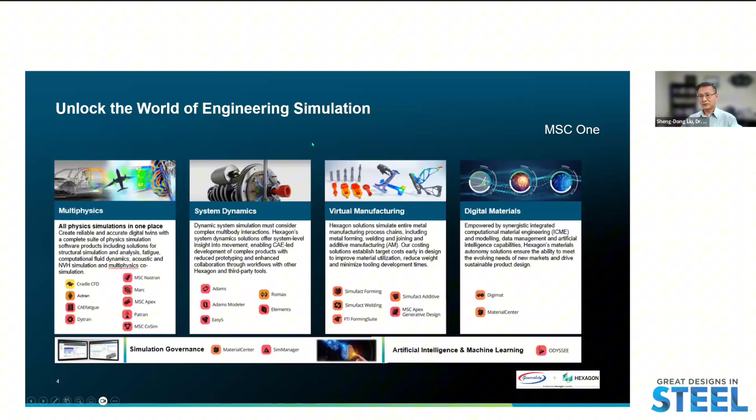Now, I'd like to talk about why do we need AI, or why do we want to introduce AI in vehicle structure design? Well, traditionally, CAE simulation in vehicle structure design is very time consuming. You need to hire a PhD or at least a master's degree holder to run or set up CAE models. To run the CAE, it takes a long time, many CPU hours, and it's very hard to handle all the complex processes. You may make an inaccurate decision because you don't have enough data, and you may get a kind of low quality results.

And the most important thing is you may not be able to utilize all the historical data. In manufacturing history, we have accumulated lots of data in the past. If we cannot utilize it, that's a kind of big waste - not only test data, but data from the manufacturing plants, and also all the CAE simulation data. We have simulated a lot of vehicle structures, but without AI, it's hard to dig out all that data and have full utilization of it. So that's why we want to use AI to help us.

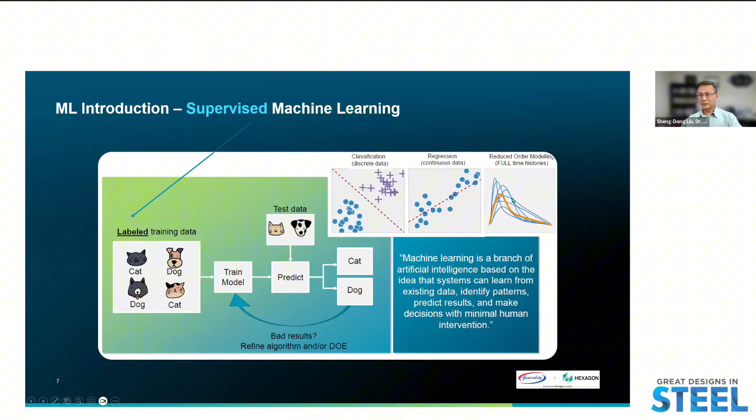If we have a new vehicle structure, we want to know what the crash acceleration curves or impact force look like at some conditions. So we ask AI to give us a kind of prediction.

And this shows how we are using AI in the CAE process. At the very beginning, we may have some design ideas. We have a lot of design variables, so we may have different ideas in this kind of variable plan, and then we start to create CAD geometry, CAD data, then generate an FEA mesh, build an FEA model. Then we run the FEA solver like LS-DYNA or Nastran or Abaqus, those types of software.

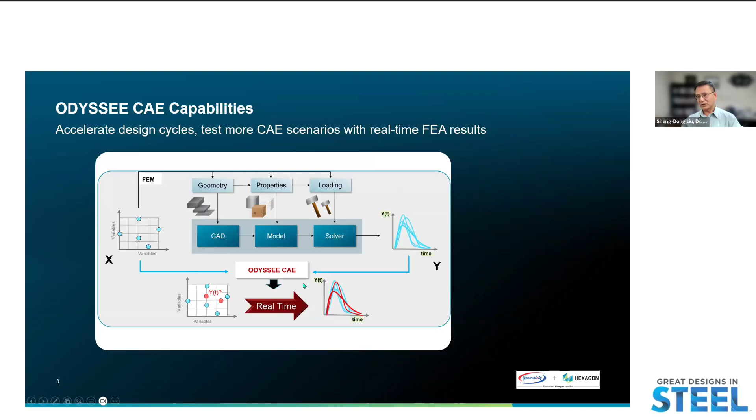Then the FEA software gives the output results like force and time curves, maybe also the stress strain distributions, deflections, those types of outputs. So next time when we have a new set of ideas or new design data, once the model is trained, we enter the data into the AI system. It will automatically, in real time, give us all types of responses. So that's how AI is working in CAE.

Where can AI be used in the design process? The first is at the pre-design stage, we can use it for parametric studies and trial and error to find which part is important, which part is not important, those types of things. Then after the design is done, we can do the optimization to find the most optimal solutions. Once the product is in operation, we can also do reliability studies and robustness evaluations.

So this graph compares the costs. Without AI, say for a vehicle crash, anytime we have an additional iteration, the computation cost basically increases linearly. So if each run is 10 hours, 10 runs will be 100 hours. It's very simple mathematics.

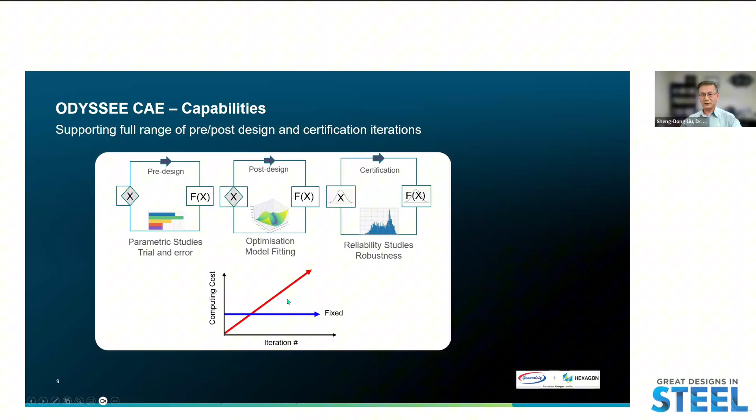But with AI, there's some initial cost at the beginning. We need to run some models to train the AI. But once the model is trained, the computation cost is very minimal. Each run maybe only takes a couple of seconds. So cost-wise, in case we need to do a lot of iterations like optimization or parametric studies, this is very, very cost effective.

Then to run AI, we start with some initial designs, called the design of experiments. We select some design conditions. Then as the animation shown here, we start with some limited number of initial training models. This red point is used for validation purposes.

So if we have a set of data, maybe we want to take say 90% of the data for training the model, and another 10% of data for validation to see if the model works well or not. So if the error is not satisfactory, we need to retrain the model. In that case, we can increase the space of design experiments. This is called an adaptive design of experiments.

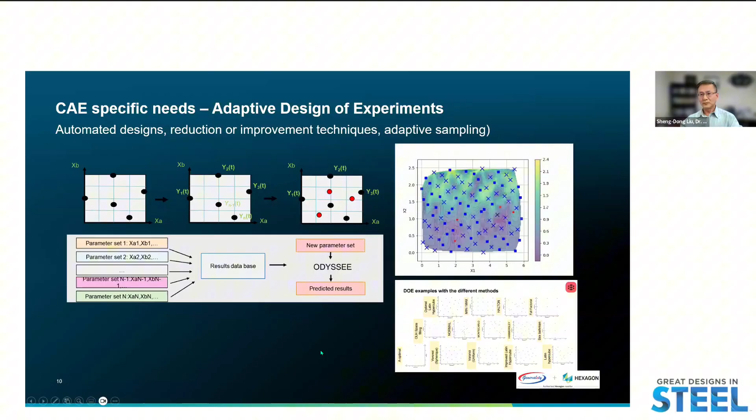Then this one compares the difference between the CAE process and the AI process. So basically, CAE works on physics. It starts from physical principles like partial differential equations. Then AI starts from data, so it's a mathematical process. So they are totally different.

CAE has a very solid physical background, so you get a solution following the physics rules. AI just uses some kind of statistics method or interpolation methods, all mathematics. The result you got may reflect the physical reality, but sometimes it may not make any physical sense. So basically, it's just a kind of mathematics processing.

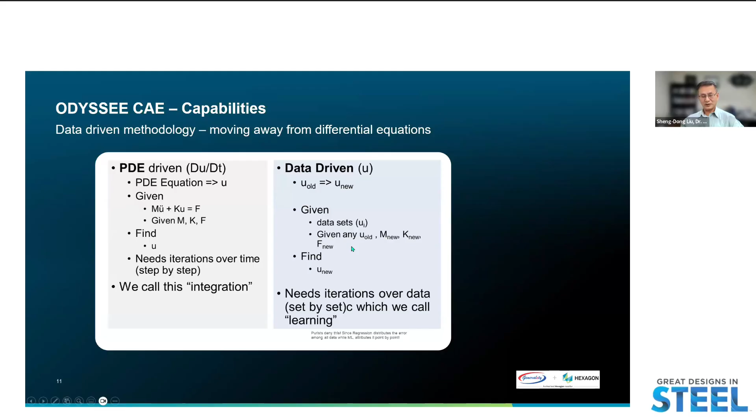What I want to emphasize on this slide is this is the most important thing, especially for CAE engineers or future AI engineers. If you don't understand all these methodologies, then your results are just like a CAE system, garbage in, garbage out. If you don't know the background of CAE, you collect wrong data and get wrong results, and even if you have correct data, if you don't know how to run CAE, you still get the wrong results. It's really the same as AI.

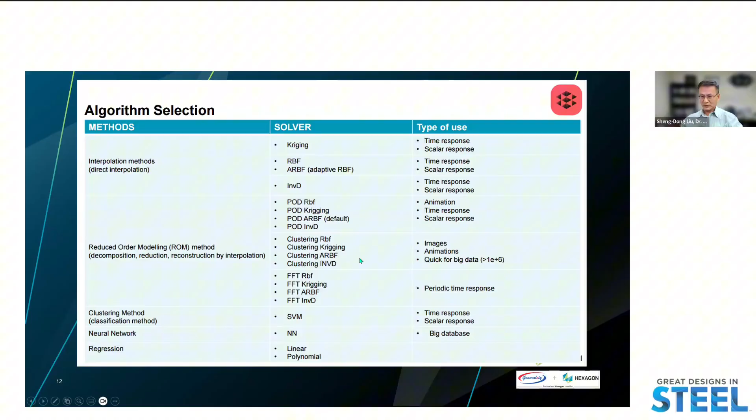AI now has been integrated with many CAE tools, from multi-body dynamics like Adams, and materials manufacturing like the stamping process and welding process. I will show you some case studies later. It also integrates with crash safety simulation like LS-DYNA and CFD, and also, of course, the Nastran and thermal analysis tools.

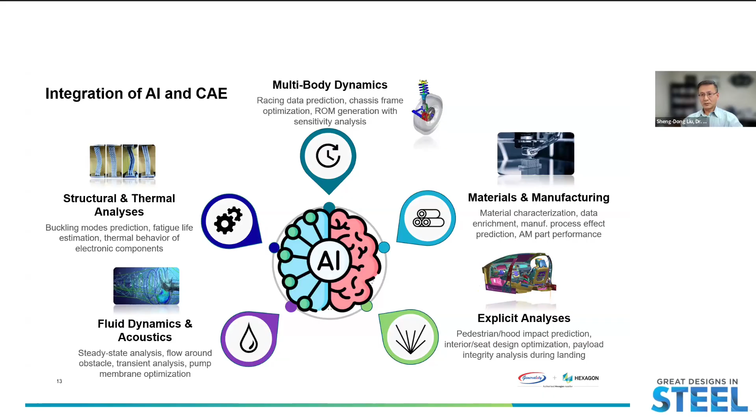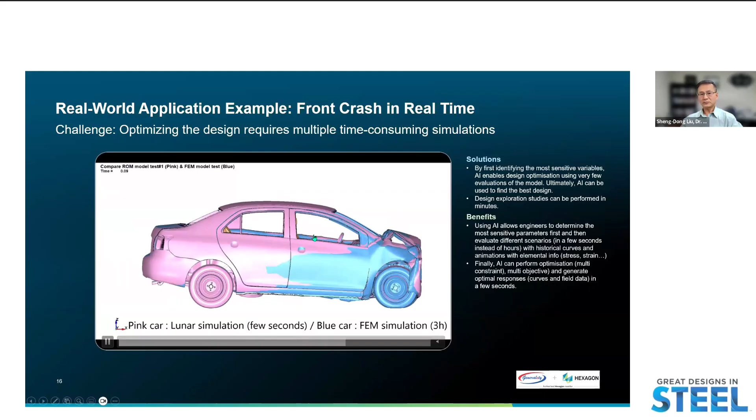This shows a full vehicle crash comparison between AI and FEA. Using FEA, it takes 3 hours to run this model, and once the AI model is trained, it only takes a few seconds to get almost similar results. The AI predicted crash model and the FEA predicted model overlap with each other pretty nicely, but the computation time is much less.

This shows AI used for occupant protection. In this case, we need to run two software, Adams and LS-DYNA, using Adams to determine the vehicle dynamics and the occupant positions, and DYNA to simulate the impact process. We only conducted 9 simulations between Adams and LS-DYNA. If we run the two simulations separately, it takes 19 hours for each run.

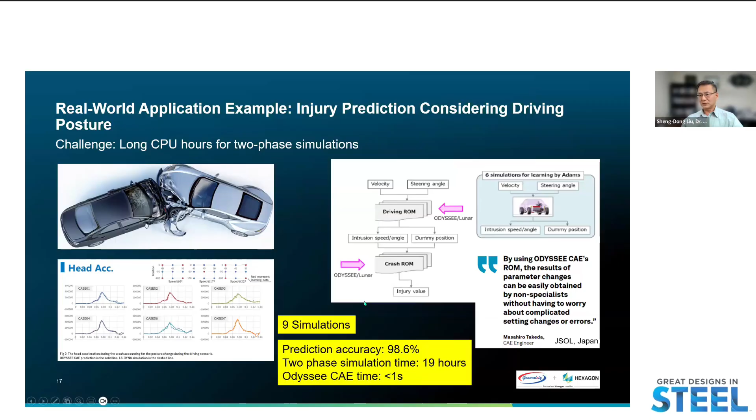Now the model is trained with 9 simulations. The blue points shown here are the training points. Once the model is trained, it takes less than 1 second to predict the head acceleration curves. As you can see, the curves match each other very nicely, and the accuracy is over 98%, and the time is 19 hours compared to 1 second. That shows the power of AI.

Now I'll show you some examples for NVH applications. This is a Honda Accord vehicle. We want to optimize the design to make the seventh natural mode to be more than 40 hertz.

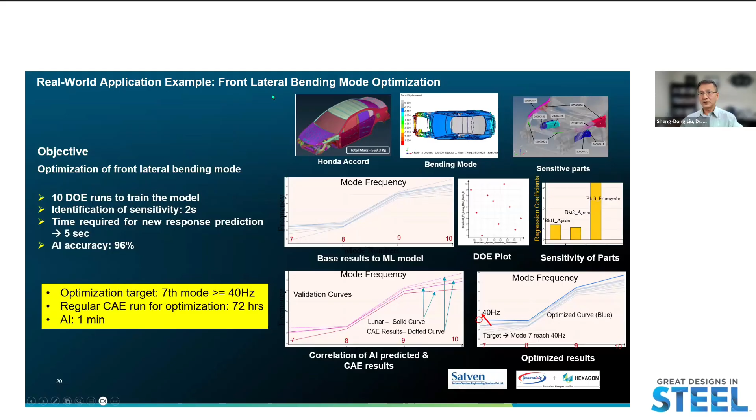So in case of without AI, we just run regular CAE. The whole process may take 72 hours, but with the AI, it takes only 1 minute to get the optimized solutions that give 40 hertz of the front lateral bending mode.

This is another example for AI applied to NVH. This is kind of a real design for the frame rail for the rear end. The rail is separated into 3 segments, and for each section we use 3 different types of materials. This is called tailor welded blanks.

Depending on the location, we may not want that much thickness, or we may want to use a different type of material. So this rail is made of 3 by 3, 9 different types of materials and thicknesses, and there are some other cross member gauges for optimization.

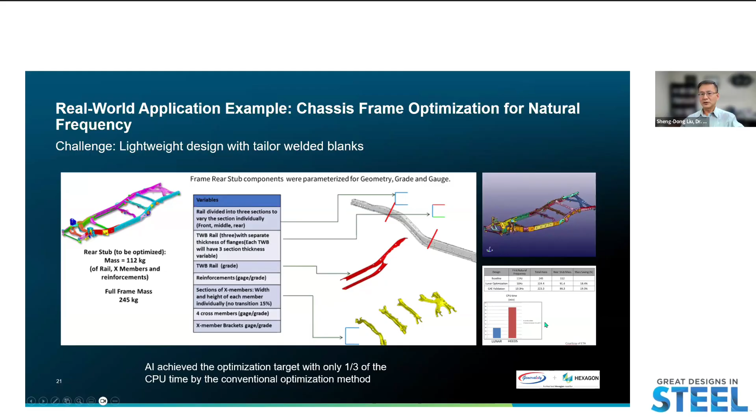So in this case, without AI, using a traditional optimization method, it may take about 15 hours. With the AI, it takes only about 1/3 of the time to get the optimized solutions. And as a final result, it helps reduce 20% of the weight from the vehicle.

Now I want to show you some examples for manufacturing process. This is an application for the metal stamping process. The material is DP600, and to train the AI model, we need to enter the blank geometry, blank position, and the tool design, what type of die we want to use.

We did something like 49 different DOE points. Each one is a kind of transient process. Each analysis has 10 forming stages. Once the model is trained, every time we have a new design, either new blank geometry or new tool geometry, we can predict new simulation results on the blank.

For this formed part, you can get either thickness distribution or stress strain distribution, and typical for the stamping process, you get a forming limit diagram, what the strain distribution looks like. So it's very powerful. This shows the comparison of the animation between the AI predicted results and the LS-DYNA predicted results.

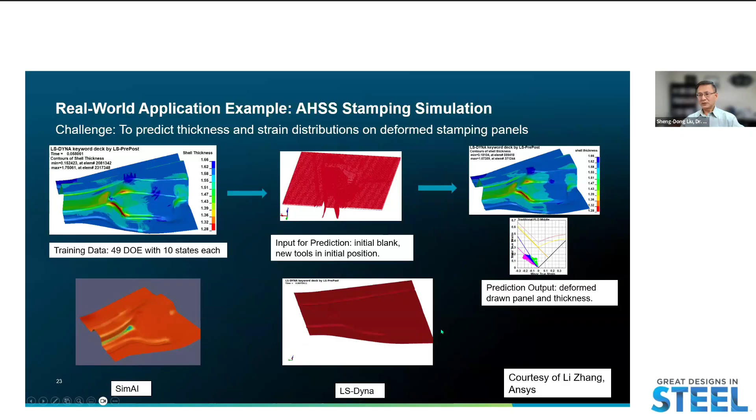And this one shows AI applications for the welding process, resistance spot welding. The AI is integrated with the welding simulation software. It helps reduce testing and optimize the welding parameters. So it can help improve the weld quality, and reduce the testing costs and also the time.

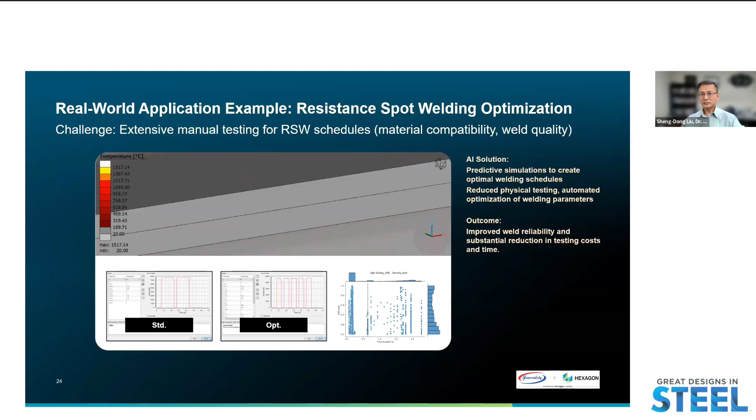Now I want to give some wrap up and some key takeaway points. AI is transforming structural design. Using AI, we can accelerate the design and reduce not only the computation cost, but maybe in the future also the labor cost.

Once the model is trained, anybody in the company can use AI. You can even put the AI on the factory floor. The technicians can quickly run AI for, say, the stamping process or welding process. So yeah, a PhD is still needed for training the model, but for running the model the PhD may not be needed anymore.

And it will definitely improve the efficiency. It speeds up the whole process, and it can utilize all different types of data. The historical test data or simulation data, everything can be fed into the AI system.

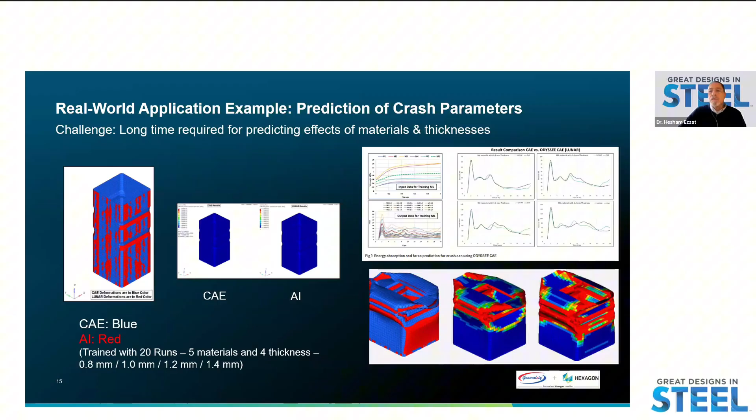When you come to, for example, the crash simulation that you showed, and you showed different cross sections that you're going to use, or different cross sections that are possible. Again, this is kind of a naive question for me, but how does the model handle that? How do you teach the model to, number one, honor all the packaging and styling constraints, and at the same time play with section sizes, section shapes, thicknesses, and things like that? It seems like a very complex problem. Maybe I'm rambling a little bit, but can you just in general comment on how we envision that in the future? Yeah, I think that you can enter the constraint conditions in the AI system.

So during the optimization process, you set up the optimization targets. At the same time, you can set up the constraints. So all the results the AI produces have to be within this frame, within these constraints. In that case, you can enter all the geometric parameters as the constraints, so it makes sure it doesn't go out of the box. Okay, so like an optimization problem, you have the ability to enter constraints and limits on certain things so that the model doesn't go haywire.